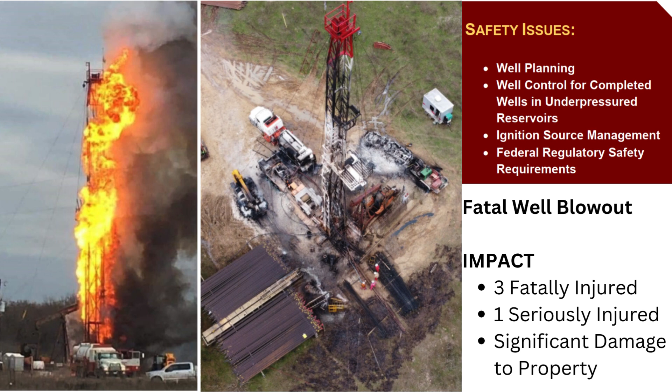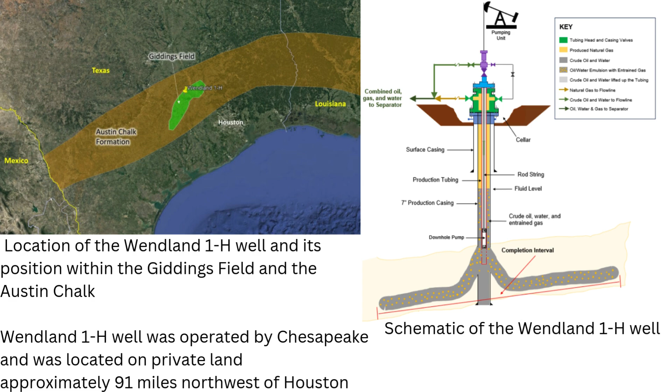On January 29, 2020, the Wendland 1H well in Burleson County, Texas, experienced a catastrophic blowout during a workover operation. Oil and gas escaped the well and ignited upon contacting an ignition source, resulting in a flash fire.

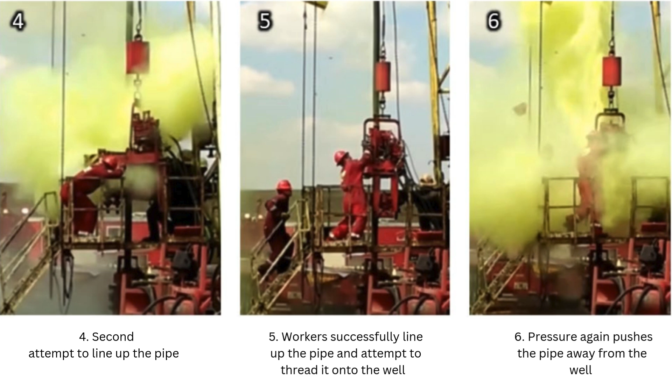Tragically, 3 workers lost their lives, and another suffered serious injuries. The incident also caused over $1 million in property damage, including the destruction of the workover rig and nearby vehicles.

What happened? In November 2019, the Wendland 1H well ceased oil production due to a suspected tubing leak. Preparations for a workover to repair the well began in January 2020.

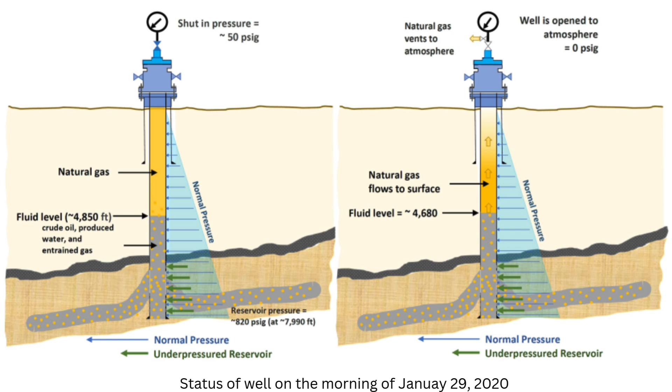On January 29, 2020, at 1 p.m., contractors pumped 50 barrels of brine into the well to create a hydrostatic barrier. However, the fluid rapidly leaked into the under-pressured reservoir, leaving the well unprotected.

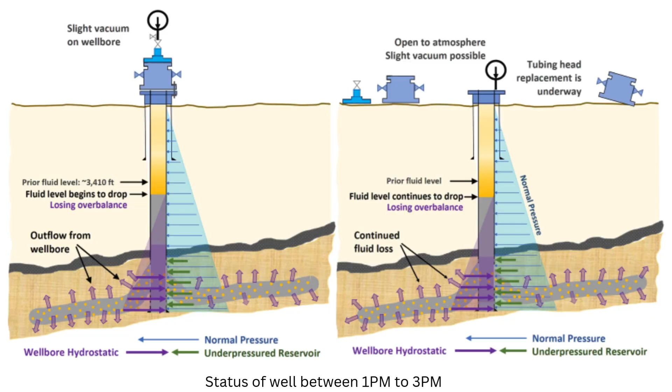At 3 p.m., while workers installed a new tubing head, oil and gas began escaping through an open stabbing valve. The hydrocarbons ignited, causing a flash fire that engulfed the worksite. The fire burned for hours, and 3 workers succumbed to burn injuries. It took until January 31, 2020, to fully contain the well.

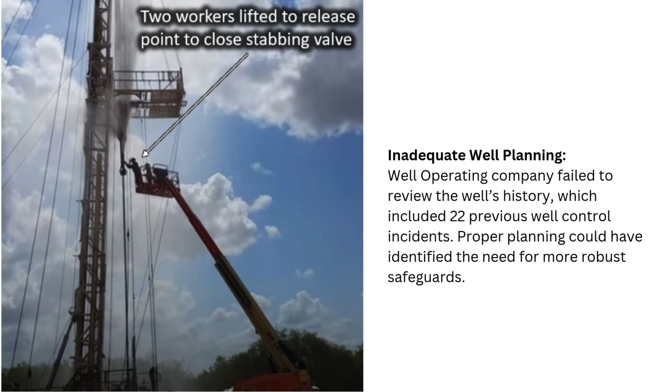What are the root causes? Inadequate well planning. The well operating company failed to review the well's history, which included 22 previous well control incidents. Proper planning could have identified the need for more robust safeguards.

Ineffective well control barriers. The hydrostatic barrier using brine was insufficient for the under-pressured reservoir, as it quickly leaked into the formation. Use of open valves. The open stabbing valve and casing valves were not effective barriers and required manual intervention, placing workers at risk.

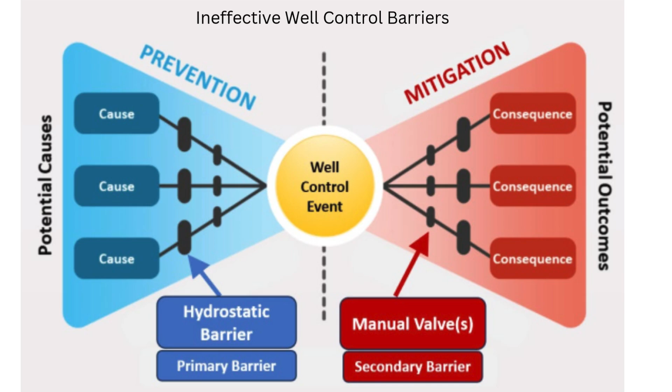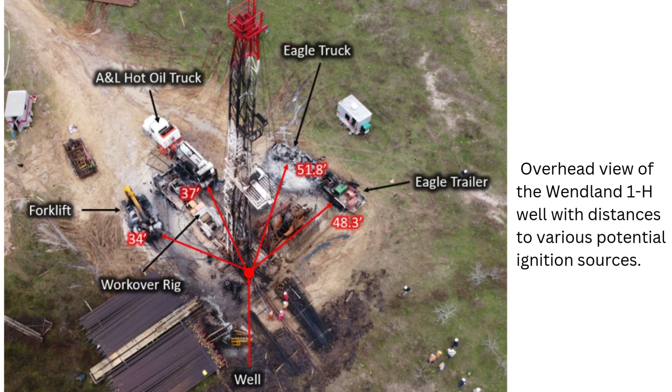Ignition source management. Potential ignition sources were not properly controlled near the flammable atmosphere, contributing to the fire. Lack of federal regulations. Weak regulatory oversight for onshore oil and gas operations allowed these risks to persist.

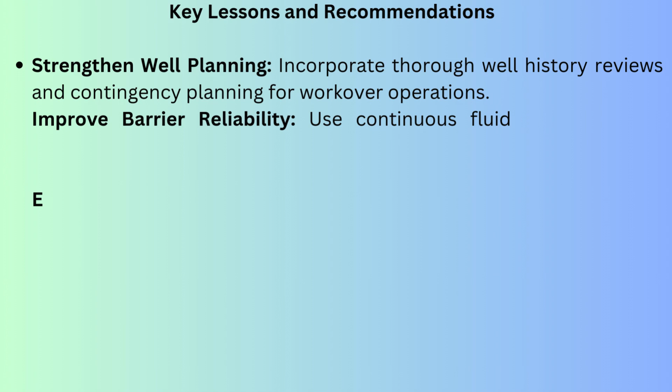Recommendations: strengthen well planning, incorporate thorough well history reviews and contingency planning for workover operations. Improve barrier reliability, use continuous fluid addition, high-viscosity fluids, or mechanical plugs to establish effective well control.

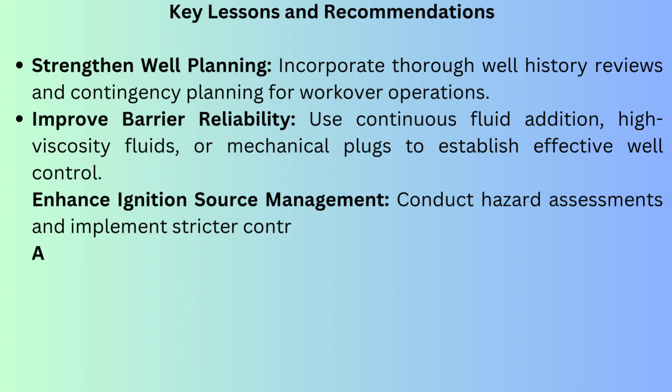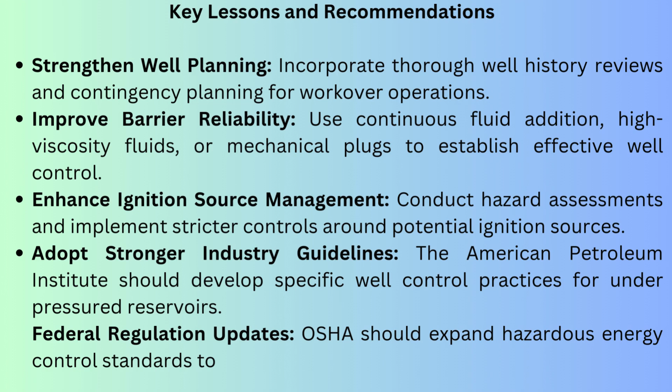Enhance ignition source management. Conduct hazard assessments and implement stricter controls around potential ignition sources. Adopt stronger industry guidelines. The American Petroleum Institute should develop specific well control practices for under-pressured reservoirs. Federal regulation updates. OSHA should expand hazardous energy control standards to cover onshore oil and gas operations.